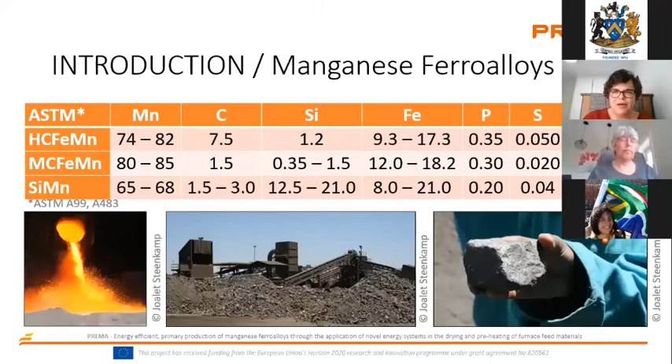So the main use of manganese ferroalloys is in steel making. It's an alloy added to steel. The breakthrough for the Bessemer process that produced steel making was developed by Bessemer. We could add manganese to the steel to deoxidize it, and what they also found is that manganese not only reacted with oxygen, but also with sulfur, and in that sense could increase the toughness while decreasing the shortness of the steel. So manganese is an important alloy, used at very low concentrations in steels, less than 1%.

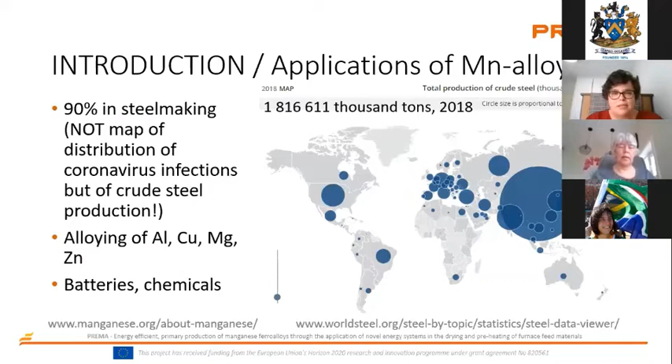Manganese itself, manganese alloys, is also 90% used in steel making, but it's also used in aluminum production, copper, magnesium, and zinc alloys as an alloying element. But there it would mainly be the electrolytic manganese that's used. Manganese is also used in batteries and chemicals as different compounds.

So that's our European partners, and that is important in terms of the PreMa project.

We have been collaborating with the Norwegians for a number of years. Personally, I've been collaborating with them since 2010, and we've walked a long road together, which has been very fruitful.

On this slide, on the left-hand side, you see silicomanganese production. It's actually much more than high carbon ferromanganese. Steel producers prefer the silicomanganese because of the type of inclusion that forms in the steel. If they don't use silicomanganese, they use ferrosilicon and high carbon or medium carbon ferromanganese production. And my understanding is that the inclusions are different, which creates problems downstream with the casting and further processing of the steel.

You'll notice that for silicomanganese, China is the main producer.

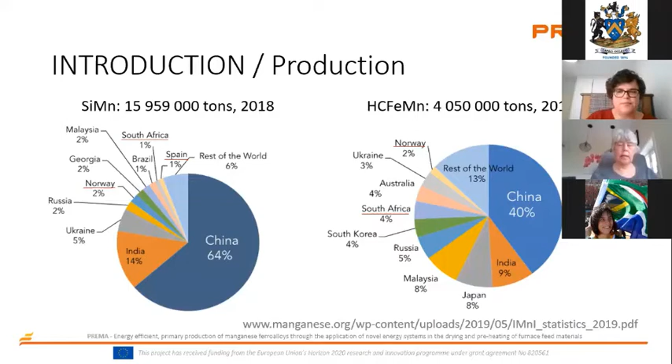So in terms of processing routes, I'll start with the processing routes followed in South Africa. And the choice of route is driven mainly by the choice of ore available. So in South Africa, we produce both high carbon ferromanganese and silicomanganese from ore. So ore is the main source of manganese.

We use carbonaceous reductants, coke, anthracite, and bituminous coal, and then fluxes. The main flux in South Africa that's used is quartz. In both instances, CO-rich off gas is produced by the process.

When you have an open furnace, the CO gas gets combusted on the top of the burden. So the off gas that's produced and cleaned afterwards is CO2 rich.

In a closed furnace, the CO gas is captured and cleaned through a wet scrubbing system. The combusted gas is cleaned through a dry baghouse system. And then in both instances in South Africa, the slag gets discarded onto slag dumps.

So here you see the composition of the slag, and what it's mainly driven by is that our ores are rich in carbonates, and that's why we have such a high CaO content. Calcium carbonate and also dolomite.

And I see my colleague Shriti is also part of the audience today, and she's a total expert on this. So if anybody wants to know more about manganese, there's just a way to go.

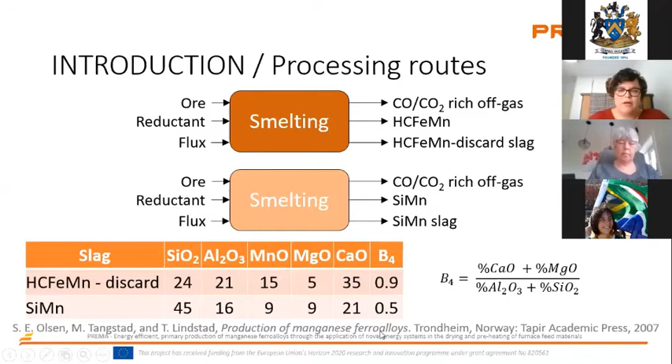But you'll notice the basicity of the discard slag. Practice is 0.9 and 0.5. Remember those numbers when we go to the next slide.

What's done in Europe and elsewhere is they follow what they call a duplex route, where they feed ore for the production of high carbon ferromanganese, and produce a slag rich in MnO. Slag composition at the bottom, the MnO of the slag is 40%.

They can do that because they have a lower basicity ores. They import their ores not only from South Africa, but also from Gabon and from Australia and elsewhere.

And Ellie can tell you more about that.

So what they do is then feed that slag into their smelters to produce silicomanganese. In this instance, the slag produced in silicomanganese production is also discarded.

Also, these furnaces tend to be closed, so they collect the CO-rich off gas, and there's a lot of interesting things that people do, like heating water, and even in Norway they heat some of the sports fields so that they can play sports in winter using the CO-rich off gas.

Combusting the CO-rich off gas. So in all these instances, wet scrubbers are used.

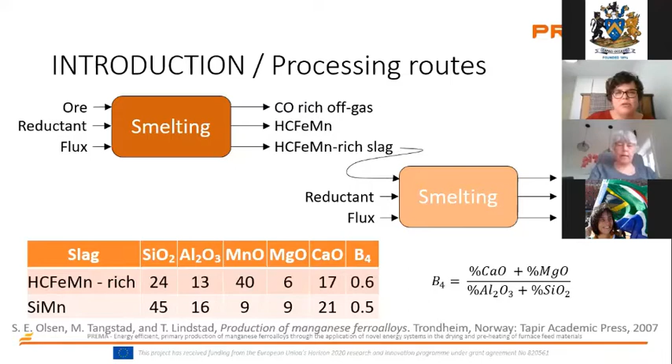So for those of you that's not familiar with ferroalloy production using submerged arc furnaces, this is a slide that was taken from a presentation by Professor Merete Tangstad. And what you see on the left-hand side is a submerged arc furnace.

The electrical energy is supplied via three what they call Söderberg electrodes. So these electrodes are very, very wide in diameter. 1.6 meters is not a funny number, it's a typical number.

And the electrodes need to be baked while production of the alloy is taking place. So it's quite a complex process to manage your electrodes as well as your process itself.

What we call a coke bed, which contains coke and slag, and then the alloy layer.

So this burden of raw material, as it moves down towards the bottom of the furnace, a gas reaction takes place. So your higher oxides of manganese and iron get reduced.

And by the time it reaches the wet coke bed, which consists of liquid slag and carbonaceous reductant, you have your iron - that's if you have a properly operated furnace - already Fe, metallic iron. Your MnO dissolves in the slag and then the final reduction takes place, from MnO to Mn. Your quartz also dissolves into the slag, and from there it reduces to silicon. And you have carbon that dissolves into the alloy.

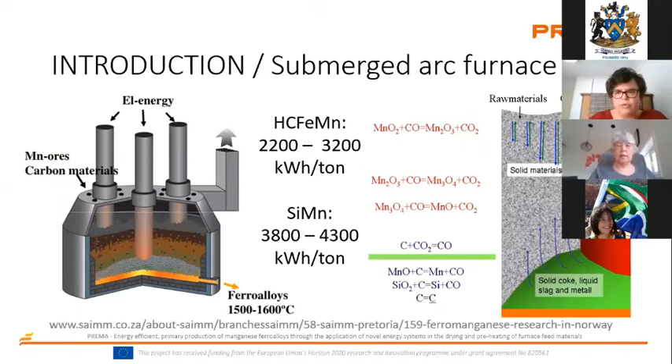And in 2020, the numbers I got recently from the USGS show we have 74% of the world's identified manganese resource and 32% of the reserve. In other words, 32% of the ore that can currently be processed to produce manganese ferroalloys worldwide.

So the South African ferroalloy industry - the pioneer that basically started it was Hendrik Johannes van der Bijl. We have Vanderbijlpark named after him, and there's a number of places where his name features. What's interesting - I read a bit of his biography, and it's a really interesting read.

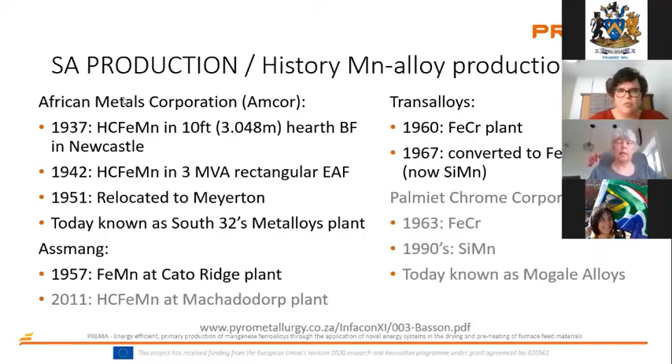Then Palmiet Chrome Corporation was established in 1963 to produce ferrochrome. In 1990 it started to produce silicomanganese. It's known today as Mogale Alloys, but their furnaces are mothballed too. So currently we have three producers: Metalloys, Assmang Cato Ridge, and TransAlloys. What you see here on the map is the location of the ore body and then the location of the smelters.

Over the past 15 years, the average electricity tariff in South Africa increased by 250% in real terms, and that resulted in plant closures with a significant reduction in installed capacity, with plants being mothballed. So the only ones in operation - Metalloys, Assmang Cato Ridge, and TransAlloys - produce alloys. Metalloys and Assmang produce high carbon ferromanganese. They don't necessarily run at full capacity at this stage, 50% or less, and they also produce medium carbon ferromanganese using converter technology. TransAlloys, as I mentioned, produces silicomanganese, and they run at full capacity.

So in 2012, I established through SAIMM the School of Manganese Ferroalloy Production. The main presenter there was Professor Marita Tangstad, who is the world expert on the production of manganese ferroalloys. Myself and Eli Ringdalen also participated in that.

Then in 2016, SAIMM hosted the second school on manganese ferroalloy production. Again, Marita Tangstad was the main presenter, and Eli and myself participated, but we also brought in more researchers from South Africa. Part of that school was a workshop, and I would encourage you to go and have a look at the results of this, which was published in the Journal of the SAIMM. The purpose of this workshop was to create a research agenda to increase the production of manganese ferroalloys in South Africa.

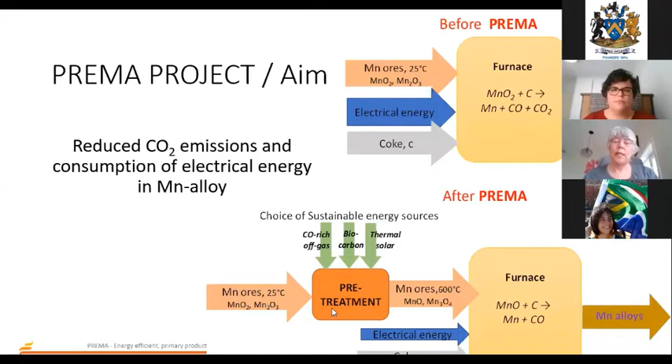By this, we will pretreat the ores so they become heated. The water will evaporate, and we will also have some pre-reduction of the higher manganese oxides down to lower manganese oxides. So from the pretreatment unit, we will feed the heated ore at 600 degrees into the furnace, and we will produce the manganese alloys as earlier, but we will still need electrical energy and coke, just less of it.

Some of you may ask, why do you need less coke from this when you've only reduced it down to MnO maximum? That is because we will then have less of the Boudouard reaction in the furnace, so we will use less unintended carbon there. Next slide.

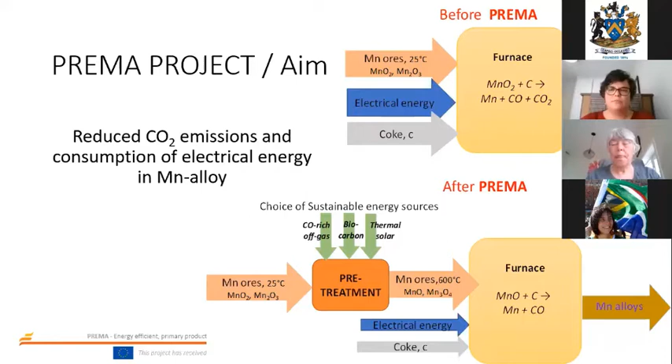The PreMa project is a Horizon 2020 project from the EU. It started in 2018 and will go to 2022. We have a total budget of 12 million euros, of which 10 million euros is paid by the EU.

And I must add that in this EU project, the industry producers also get most of their costs covered. So some of this budget is also for the industry producers.

The project includes all the manganese alloy producers in Western Europe: Ferroglobe in Norway, France, and Spain, and Eramet, which is in Norway and in France.

OFZ in Slovakia, and we are lucky to have with us also one South African manganese alloy producer, Transalloys.

In addition, we have two of the equipment suppliers, both Outotec Germany and Outotec Finland, that were part of the development of the equipment. We also have research institutes within metallurgy: SINTEF in Trondheim, where I come from, and Mintek, where Joalet comes from.

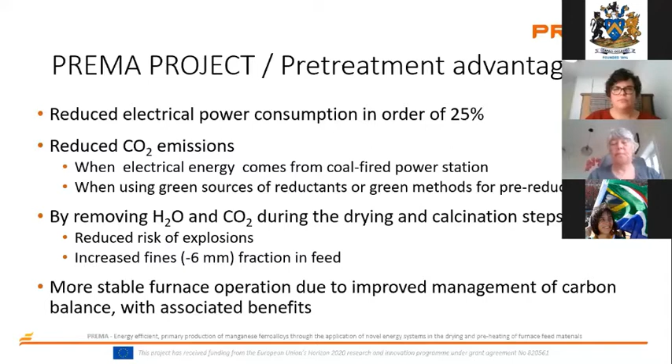This is not new - we're going to bring it up to industrial level, but it's not a new technology. I think most of you in South Africa know that some pre-treatment is done on chromium ores.

The main idea from Kashima Works was that they wanted to reduce their consumption of electrical energy in the SAF furnace, the submerged furnace, because of the availability of electricity.

So they introduced a pre-reduction unit before it, and this is coal-fired, so it will not give any reduction in CO2 emissions as we aim for in PreMa. And they use offgas from the furnace at 400 degrees.

They feed the raw materials at 600 degrees into a submerged furnace, together with some remelt, and then they produce slag and metal.

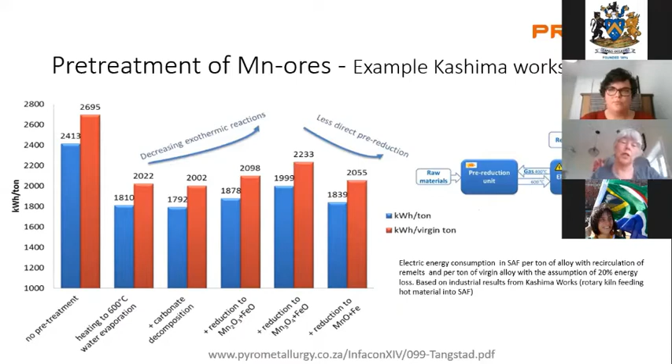400 to 600 kilowatt hours per ton, depending on how much you pre-reduce. This is a considerable amount, and this has been done for several years at Kashima Works.

So for pretreatment, we identify this as a natural stream to use, energy that is not often used at the place but is available there.

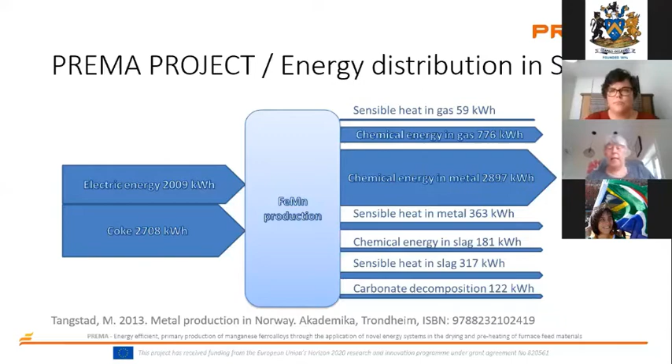So then what do we really want to do? This gives some background, but now what do we really want to achieve in the PreMa project? What is our aim? The overall objective is to demonstrate a technology for pretreatment of manganese ores, bringing it up to the level close to industrialization. The technology should increase energy flexibility, energy efficiency, enhance raw material use of fines, and reduce CO2 emissions in the production of manganese alloys.

We'll look into doing this by demonstrating various pretreatment technologies using different energy sources like CO-rich industrial off-gas, biocarbon, and solar thermal. All of these will be developed and demonstrated, and we will bring it up to be ready for industrial implementation through design, engineering, cost figures, and impact assessment for full industrial scale, together with a business plan for industrial implementation. The goal is to have this ready when we finalize the project.

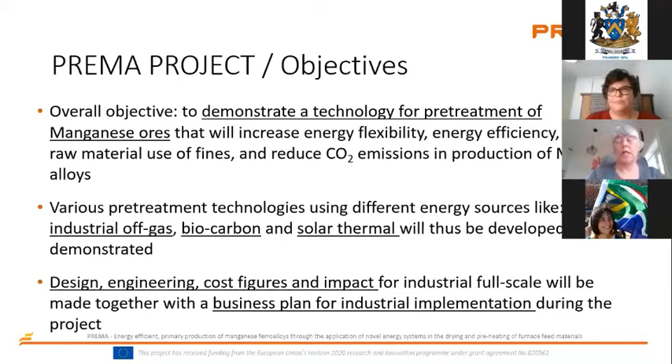But this does not come by itself. It requires a lot of work and investigations. First, pretreatment effects vary a lot between different ores, so we have chosen 3 different ores to investigate, plus 1 actual charge mixture, because most use a mix of different ores in the charge mixture. We are going to study these to gain knowledge about their properties and how they are affected by pre-reduction.

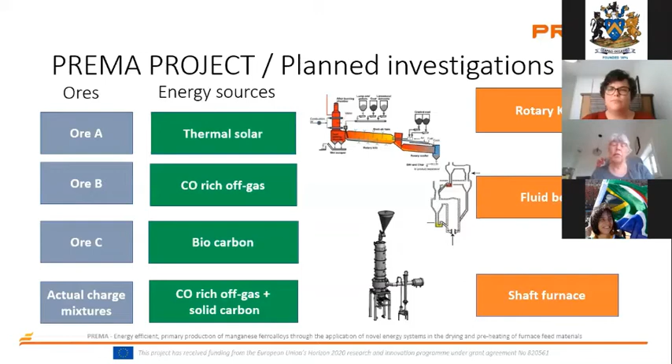We are going to look into different energy sources: thermal solar, CO-rich off-gas, biocarbon, and also a mixture of CO-rich off-gas and solid carbon. Then, of course, we need the technologies, and we have planned to investigate 3 different technologies: rotary kiln, fluid bed, and shaft furnace.

Just to mention, for the thermal solar, that is maybe very relevant for South Africa. I assume most of you know a lot about it from what Lina has been working with. But the main idea is to concentrate the heat energy from the sun, so you can warm up air up to 800 degrees and then preheat the ore with this air. I think this can be very relevant for South Africa and Southern Europe, but maybe not so much used in Norway.

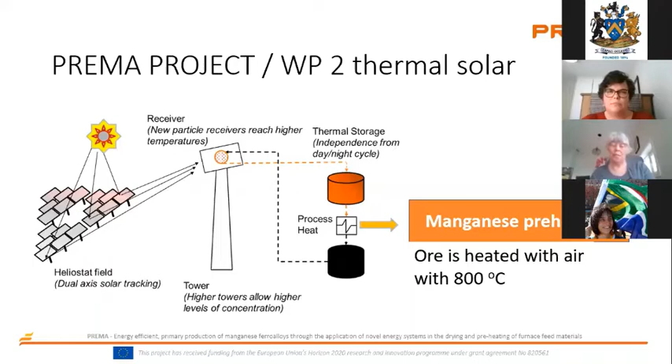Pretreatment and pre-reduction technologies in different pilots. This will be done in batch scale, producing around half a ton to 1 ton of material minimum. First, the rotary kiln will be investigated by Eramet Ideas, or what was earlier Eramet Research, and in fact they have already run an experiment in the rotary kiln. Outotec will also investigate the rotary kiln and also plans to investigate the fluid bed at their laboratories. In addition, we want to look into the possibility of using a shaft furnace, as was planned at Ferroglobe, and this will be connected to industrial production using industrial off-gas.

We'll take industrial off-gas from a closed furnace, and with the composition of that gas, use it to pre-treat the material in a pilot shaft furnace. The material produced in this pilot will not be taken back to industrial furnaces. It will be cooled down, but we need to know how the pretreatment will affect furnace operation and how much we gain in CO2 emissions.

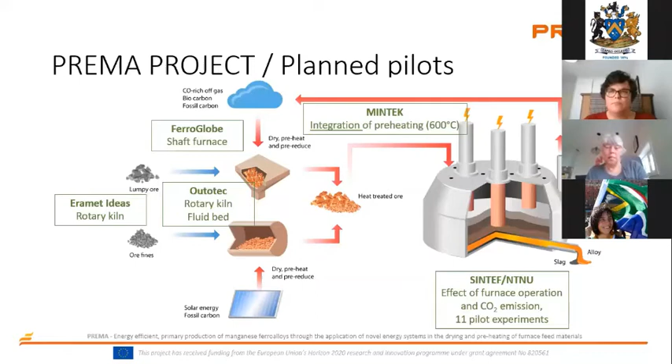And Joalet will tell you more about that. So, Joalet.

I'll repeat that. What we call this facility is the Bay 2 preheat facility, because it will be installed in Bay 2 of Mintek, which has 7 bays where we host our pilot facilities. It's a joint facility being developed between the PreMa project and the TIMAC project. The PreMa project looked at integration of a preheating system, and for financial and practical reasons we decided to buy an electrically heated rotary kiln to heat the material.

For the PreMa project, that kiln will be integrated with the AC furnace, operated in submerged arc furnace mode. The TIMAC project will look at the reduction of titaniferous magnetite in a DC open bath arc furnace. So for the TIMAC project, the kiln will be coupled with the DC furnace, not with the AC furnace.

What we do share is an integrated materials handling system, product handling, and water cooling system, and I'll show you a bit more detail about it.

The purpose of the PreMa project is to study the coupling between the preheater and the AC side. We know from industrial-scale ferrochrome smelters in South Africa with preheaters integrated in their flow sheets, as well as ilmenite smelters with different types of preheaters, that unstable operation of the preheaters destabilizes the submerged arc furnace, or the DC smelter in the case of ilmenite smelting, to such an extent that plant operators decide to switch off the preheater rather than deal with instability.

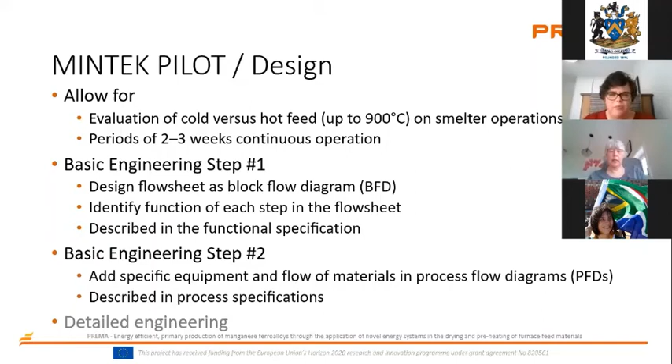This work was summarized and published and presented at TMS this year in February, and I hope I provided a link for that paper if you want more details. What I show you on the left-hand side is the block flow diagram, and on the right-hand side what we have in place, or then what we intend to design.

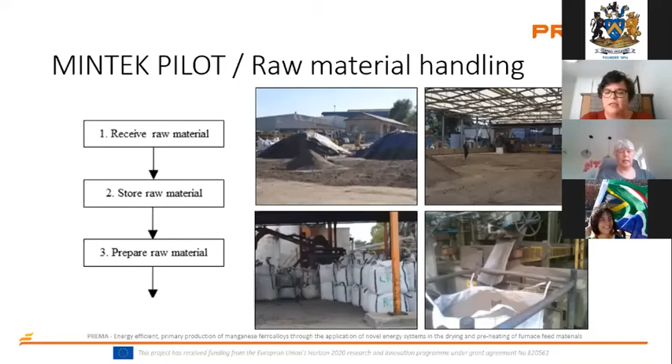In terms of raw material handling, we can receive material in bulk, shown in the top left photograph, stored covered with tarpaulins. The next step would be to dry it in a shed, and then bag it in bulk bags, which we use as part of our feed system. We can also receive material that's already in bulk bags, which is a standard facility already in place, used frequently when we run campaigns.

For the DC furnace, we will want to feed either cold material directly into the furnace, or material via the preheater to the furnace itself.

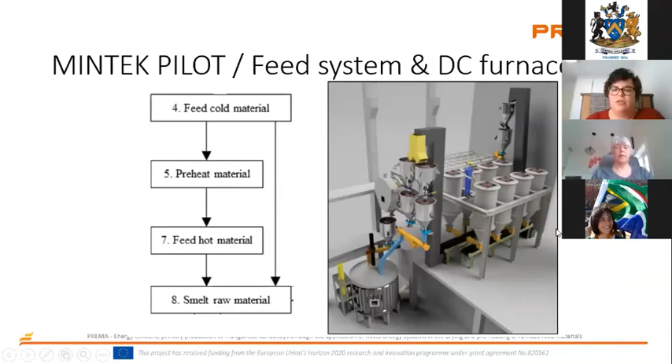On the right-hand side of this sketch, you see the feed system. We have 4 bunkers that can feed the rotary kiln to the back. You see the bucket elevator feeding into the rotary kiln to preheat materials, and there's also 4 bunkers that can feed into the bucket elevators, feeding cold feed into the furnace. We will be able to run that simultaneously.

What you also notice on this slide is the DC furnace has one electrode. On the AC furnace, it's the same feed system with a slight modification. We have a mixing bin on the outlet side of the rotary kiln, where we feed our raw materials - our ore through the rotary kiln to preheat the ores, and then we feed the flux and reductant into the mixing bin, and from there feed into the furnace. You'll notice we have 3 electrodes there.

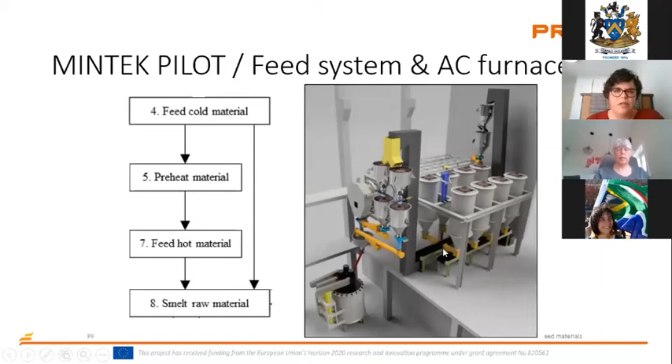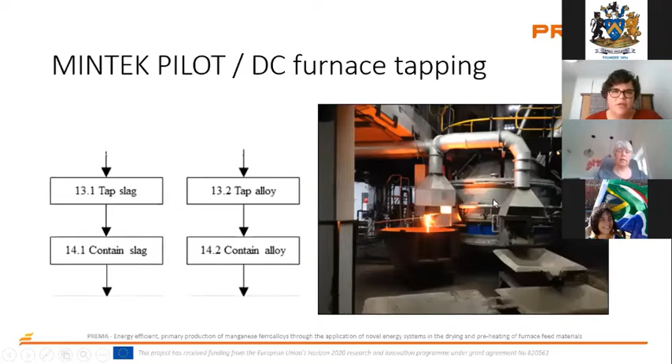For furnace tapping, we can either have bi-level or single-level tapholes. For the DC furnaces, we typically have bi-level tapholes, so the slag taphole is slightly higher than the alloy taphole. We tap alloy into ladles, and what you see here is the slag being tapped into a slag pot. You notice our fume extraction system, and this is one of our existing furnaces, but we will duplicate this system also in bay 2.

For the AC furnace, we have a single level taphole, and we basically tap both alloy and slag into our ladles, and then once everything has cooled and solidified, we'll separate them manually.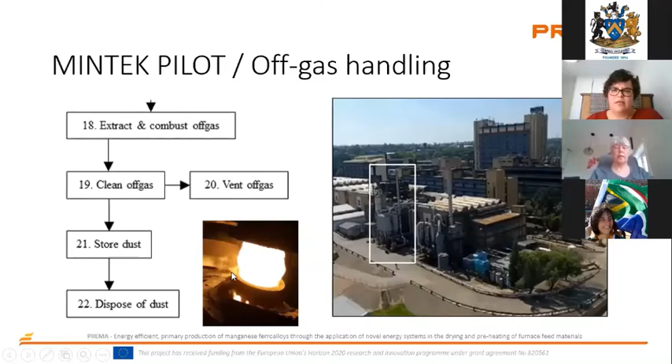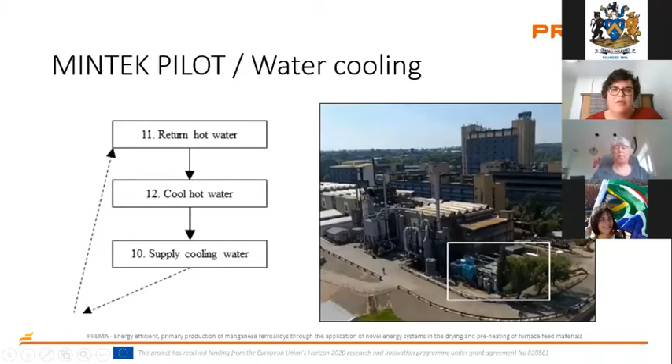We also have a water cooling plant, which you see on the right-hand side, marked there in a white block. That plant supplies cooling water to all 7 of the bays, and we have dedicated pumps supplying water to our system wherever we need it.

Already the next steps, as I said, we'll do the detail engineering. We need to finalize the process description and the PFDs. We need to develop the process control strategy and the piping and instrumentation diagram. We have a colleague, Ashley Davey, that's excellent for that. He's already working on it.

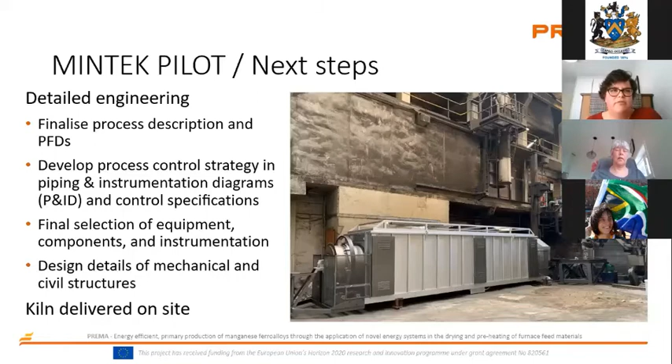So we will do the control in-house. And then we'll do the final selection of equipment, components and instrumentation, specifically for the feed system and the two furnaces, and do the detailed engineering of mechanical and civil structures. What you see in the photograph here, as I said, we bought a kiln to preheat the material, and it was delivered on site earlier this year, in February.

So thank you for your time and for listening, and I look forward to all the questions.

That's it from our side, Isabel. Thank you. Thank you, Joalet and Ellie.

I think that was very comprehensive. A lot of people don't always know what we do and how these projects work and fit together, especially people who don't particularly work directly in the research industry. So it's always great for us to share how these projects are put together. And it's not just easy - you guys didn't just walk up to the EU and say, please give us money. It took a lot of hard work, and I want to congratulate you guys on all of that. And I think the message for today is just how amazing it is that we can collaborate, Norway and South Africa being so far apart. So I'm very excited about that as well.